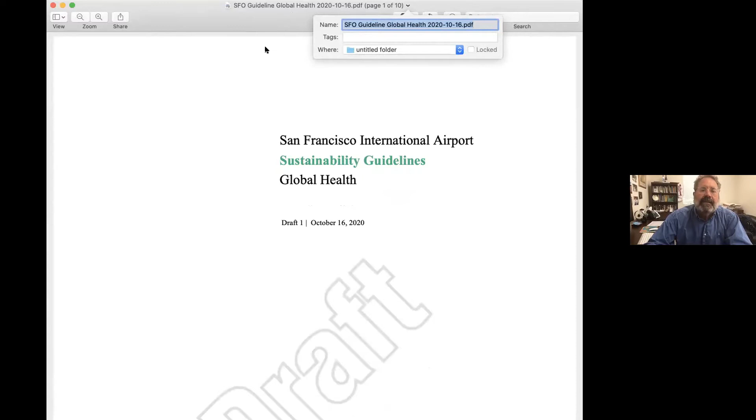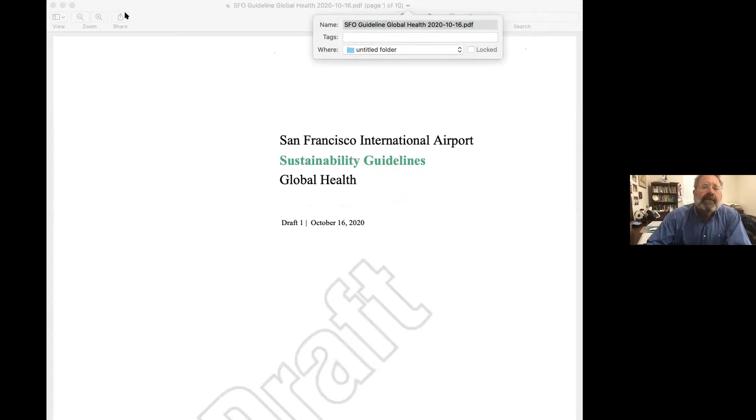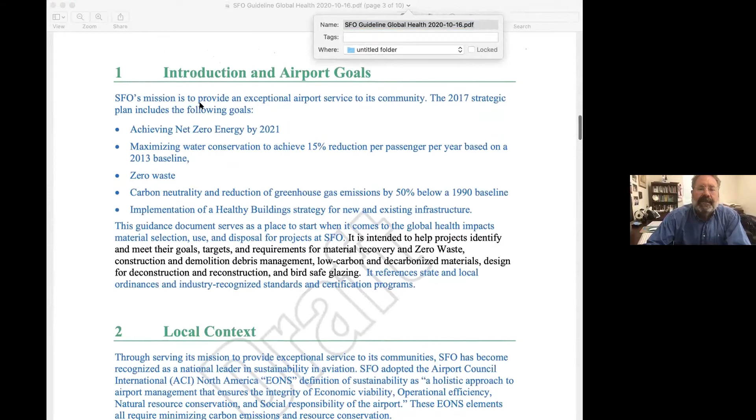Now, systems for demonstrating the value are being developed all over now. This, for example, is from San Francisco International Airport. And these are the guidelines they're using for the further development of the airport. They've set out guidelines over the coming decade of how the airport is going to achieve 50% emissions below 1990 base levels in both their operations and the material selections that they have.

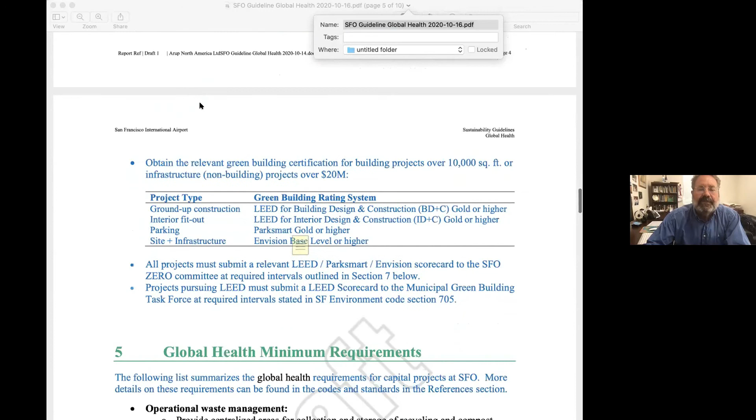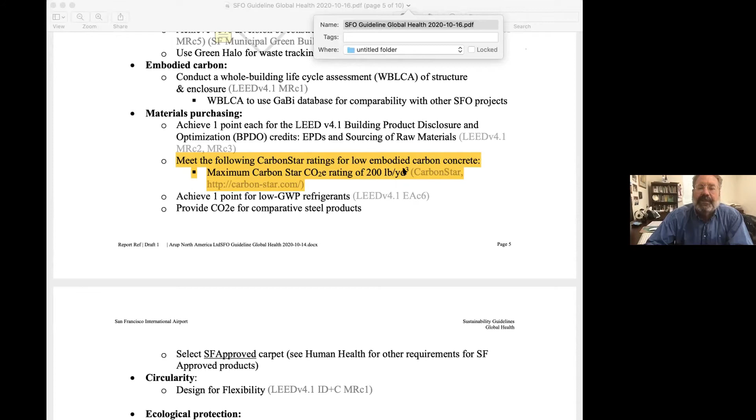So for example, they have the typical LEED certification that you would use, but when it comes to the concrete, they're specifying the carbon intensity of the concrete using the Carbon Star rating system, the new rating system for quantifying the carbon intensity of concrete, which is auditable by a third party and a repeatable methodology for essentially an LCA on concrete. Here they are specifying concrete that's 200 pounds of CO2 per cubic yard, whereas a typical yard of concrete may be 600 pounds.

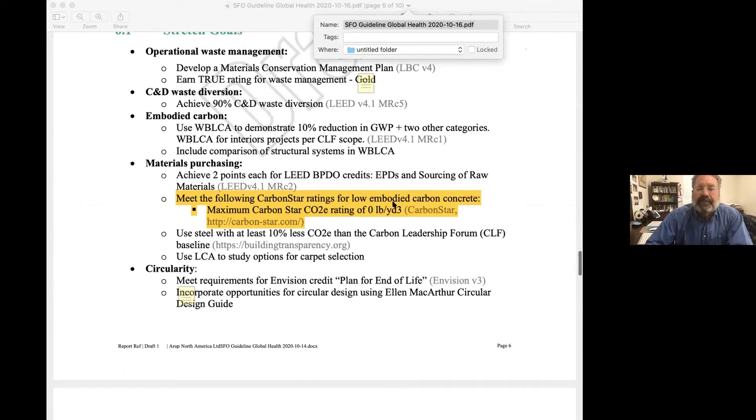They have stretch goals where they're seeking concrete that's 0 pounds per cubic yard, meaning carbon neutral in their build out. And even exceptional project goals where they have carbon negative concrete, where they've been able to sequester CO2, in this case using carbon sequestered aggregate, to make the concrete where we're storing the CO2. Now these systems are developing broadly and will undoubtedly see a lot of traction in coming years.

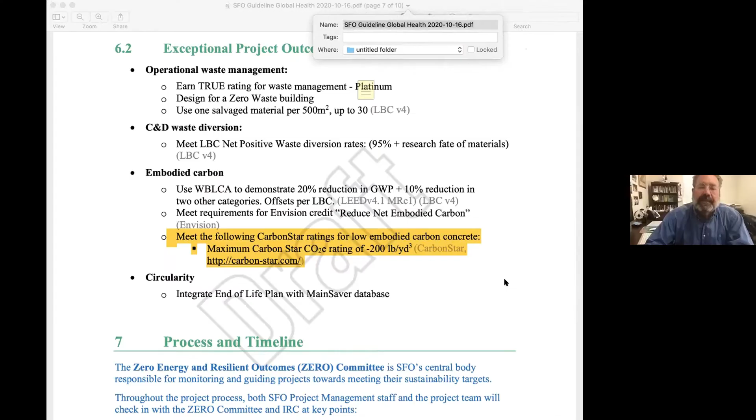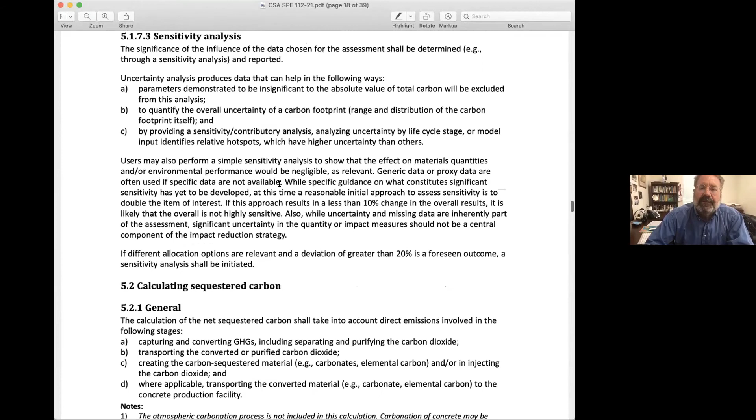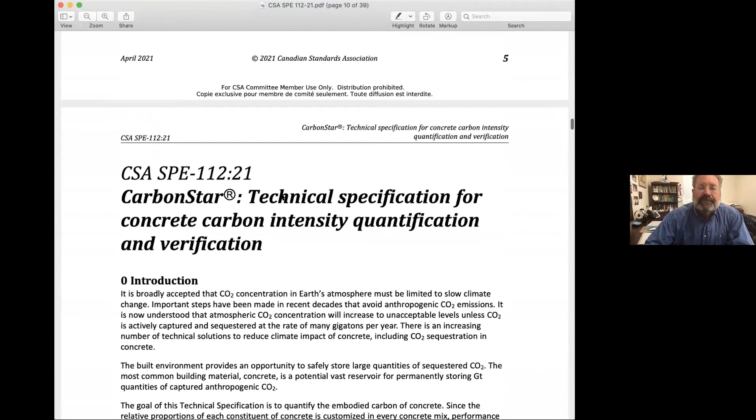For instance, the Canadian Standards Association has recently issued the Carbon Star North American Technical Standard, which allows for the specification of the carbon intensity and how to quantify it and verify it. This allows governments to use their procurement of materials that have sequestered CO2 in them to quantify the amount of CO2 that will be sequestered.

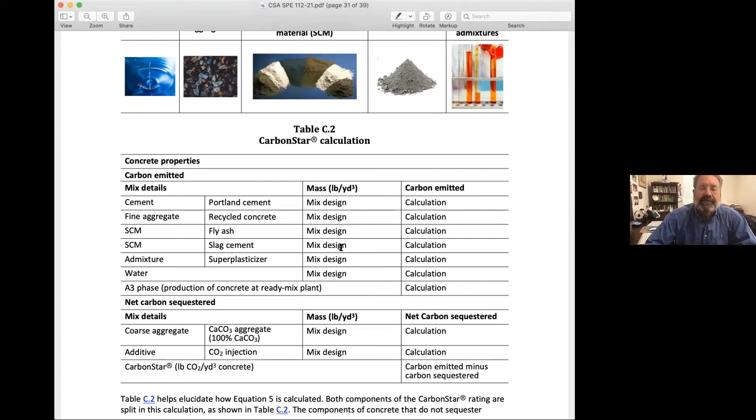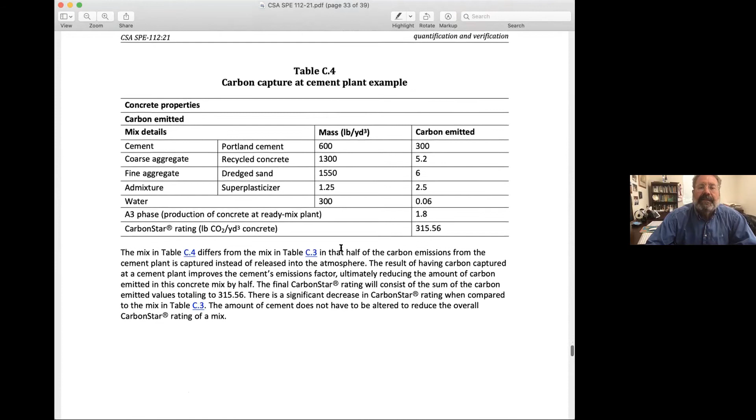And this is where the concrete industry can really step in and make a difference, not only with understanding what the real carbon intensity is of concrete in a verifiable, validated method that's auditable by third parties, but also provide examples of how their leadership can lead the whole climate change community and provide significant guidance for how we're going to meet our goals in Glasgow.

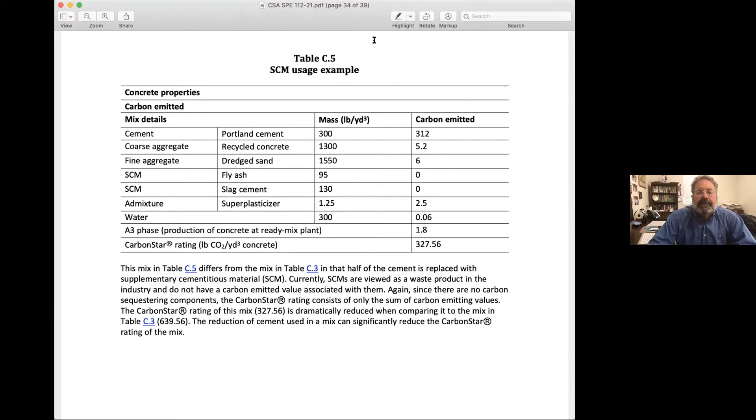Thank you for allowing us this opportunity to share our innovation for the cement and concrete industry, CO2 utilization for concrete. In today's presentation, I'll share a little bit about how CarbonCure technology works and where we're available.

First of all, did you know that the World Green Building Council has begun its Advancing Net Zero campaign, which is bringing embodied carbon up front? In this campaign, the goal is to reduce embodied carbon by 40% by the year 2030 and to eliminate embodied carbon by the year 2050. Now, embodied carbon is the carbon footprint of buildings before the lights are turned on for the first time. It's the carbon footprint that comes from building materials and construction.

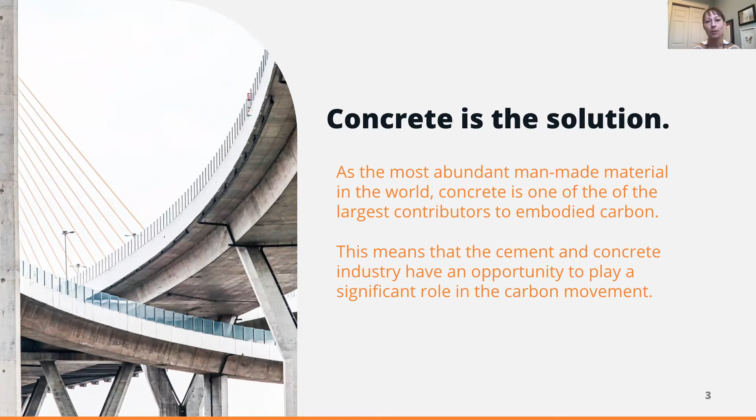Concrete has the opportunity to be part of this solution. As the world's most abundant man-made material, concrete is one of the largest contributors to embodied carbon today. This also means that concrete has the ability to play one of the most impactful roles in achieving net zero embodied carbon. CarbonCure is working with the cement and concrete industry to help decarbonize the industry to meet these objectives.

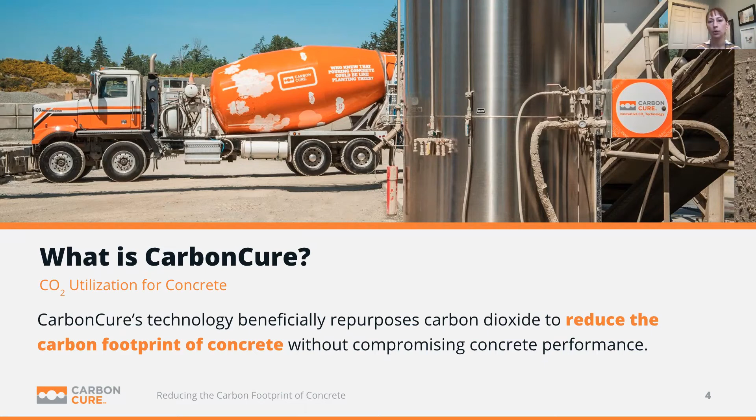What exactly is CarbonCure? We are a CO2 utilization technology provider for concrete. CarbonCure's technology beneficially repurposes carbon dioxide as an admixture to reduce the carbon footprint of concrete without compromising the concrete's performance. A little bit of background information about CarbonCure. We were founded in Halifax, Canada in 2012 by Rob Niven, our CEO and founder.

To date, our technology is in use at over 350 concrete plants across the globe. Most of this is within the United States. We are beginning our expansion to other parts of the globe, including Europe, Asia, and Australia. To date, over 8 million cubic meters of concrete have been produced using CarbonCure. Now, this concrete is being delivered to a wide range of construction projects, some of which I'll highlight, ranging from rural driveways through to large industrial warehouses and offices and highways.

CarbonCure recently was named the NRG COSIA Carbon XPRIZE winner. This was a really prestigious competition that spanned over 5 years, in which the goal of the competition was to utilize CO2 to make valuable products. Our co-winner of this competition was also an innovator in concrete. And this really shows how much concrete has the ability to be part of this solution, the carbon solution through CO2 utilization.

We're also very proud to be 2020 North American Company of the Year and to be backed by many fantastic and recognizable companies that are supporting our global expansion and supporting our company's success. Now, our mission is to reduce 500 megatons of carbon emissions annually by the year 2030. This is equivalent to taking 100 million cars off the road. In order to achieve this mission, we need the partnership of the cement and concrete industry. We're looking for a partnership with you.

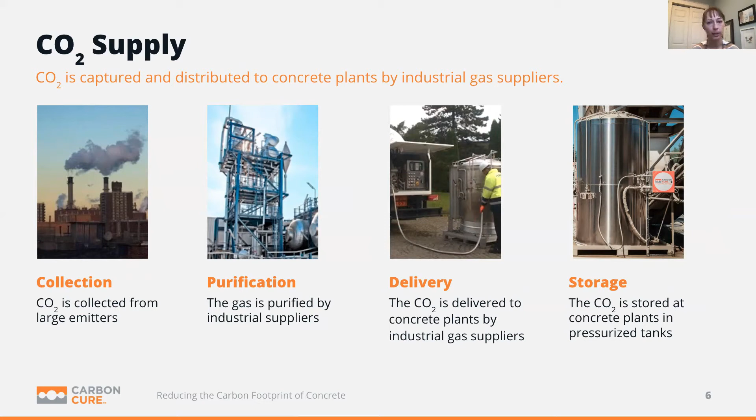At every concrete plant where our technology is installed, the CO2 supplier will install a pressurized tank where the CO2 exists as a liquid. That CO2 supplier will then come by on a regular basis and refill that tank with CO2 as needed. Our technology is a precise metering and injection system. We are pulling that liquefied, purified CO2 from the pressurized tank and introducing a precise amount into the concrete as it's being mixed. This is all integrated with the batching software that exists at any given concrete plant, and it's delivering a precise dose based off of the particular batch of concrete that's being loaded at that moment.

Now, this is happening at the same time as other processes in the batching sequence, and so it's not impacting the cycle time or the time that it takes to make the concrete. At the end of the day, really, from an operational perspective, it's exactly the same as introducing any other kind of admixture.

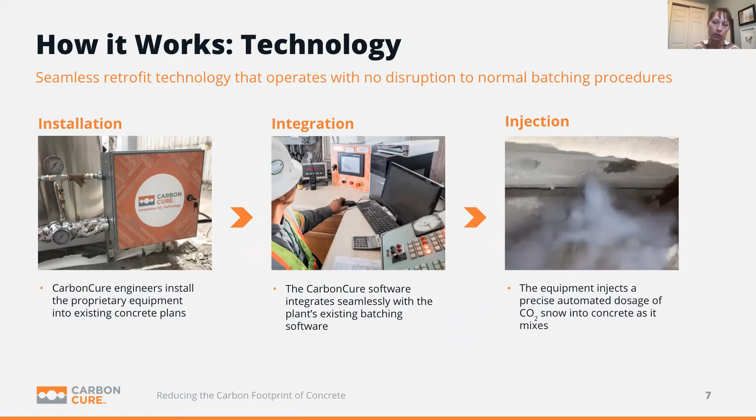Now, what happens when that CO2 is introduced into the concrete mix? A chemical reaction occurs where that CO2 finds calcium ions from the cement, and these two materials in the presence of water have almost this magnetic attraction to each other. They bind together and immediately begin to convert into calcium carbonate, which is essentially limestone. So we are turning what used to be a greenhouse gas into a mineral that now becomes permanently embedded in the concrete.

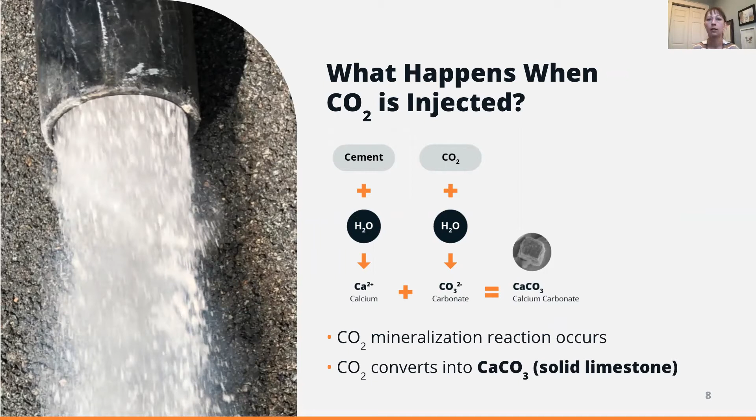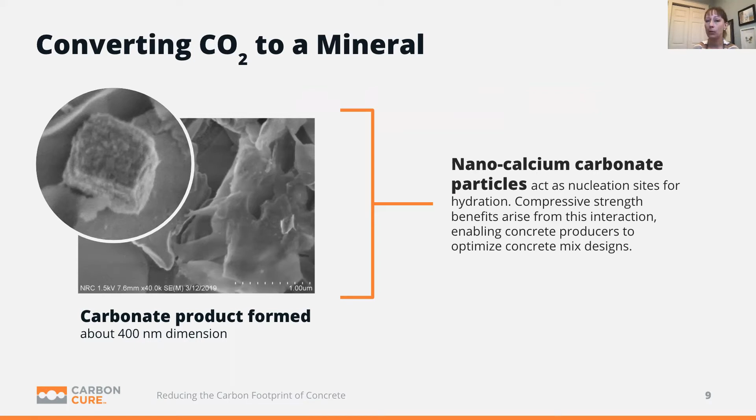What's even more important about this process is that this mineralization of the CO2 improves the concrete's compressive strength. The mechanism behind this is we have this CO2 that's being introduced into the concrete and at a nanoscale is converting into these nano-sized calcium carbonate particles. And these nanoparticles are smaller than silica fume. They become embedded throughout the matrix of the concrete mix. These nanoparticles will bind to the cement grains and increase the surface area of the cement grain, making that cement more efficient. So with more efficient cement, that enables concrete producers to in turn engage in mix optimization.

The CO2 has a neutral impact on the fresh and hardened properties of concrete. There have been many, many studies conducted by academics, by third-party organizations, such as in the United States, departments of transportation, that verify that the fresh properties, the set time, workability, concrete pumping, air content, temperature, finishing are unaffected by CO2. Hardened properties, freeze-thaw, pH, density, durability, color, texture, again, unaffected. In fact, some studies are indicating that there are certain durability properties that may be improved through the use of CO2.

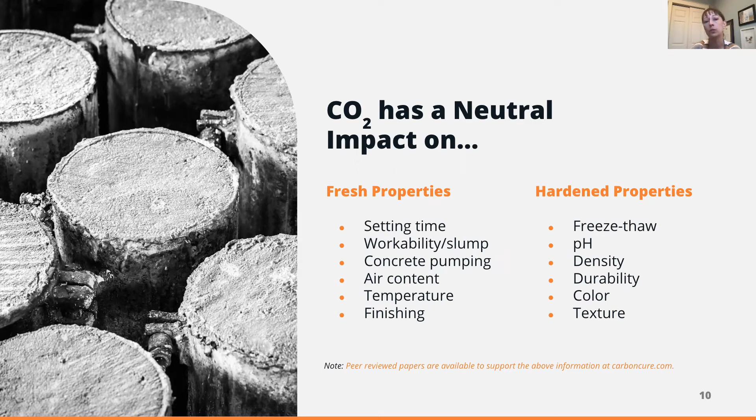At the end of the day, the concrete that's delivered to construction sites meets the same quality and control standards, the same compressive strength, but with a reduced carbon footprint. The amount of carbon that can be reduced really depends on a number of factors. It's very mix specific. It's typically between 12 to 20 kilograms of CO2 per cubic meter can be reduced. This typically represents about a 5% reduction in the overall carbon footprint.

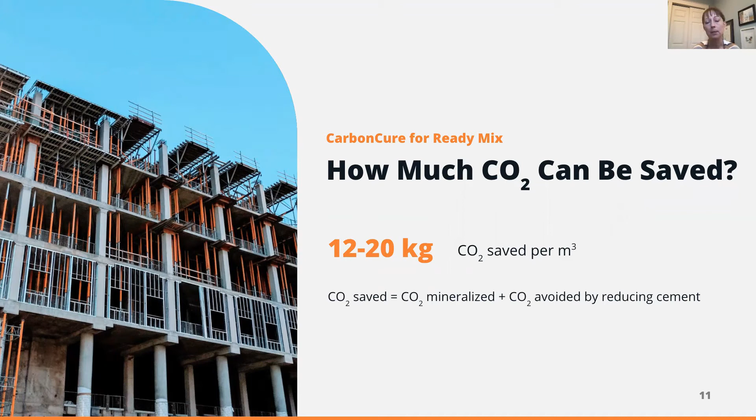Now, the CO2 is saved through both a combination of mineralizing CO2 and by optimizing the cement content in order to reduce further embodied carbon. As I mentioned, we've been utilized on a number of projects to date, primarily across the United States and Canada, some of which I'll highlight here. So everywhere from in Halifax, Nova Scotia, where we have lots of freeze-thaw conditions to consider. Here's an example of a hockey arena. You can see on the far right, again, another Canadian project. This is a de-icing apron with the Calgary airport.

So on this particular project, it was 25,000 cubic meters of concrete supplied from a portable batch plant over the course of 8 weeks to deliver concrete paving used for airport tarmac. So as you can imagine, this was a very stringent application that required thorough engineering review, and we're very pleased to say that concrete was supplied successfully, and that airport is in use today and with great success.

If you'd like to look at other parts across North America, one of the buildings that I'd like to highlight is perhaps our marquee project currently underway in Arlington, Virginia, Amazon's headquarters. In this particular phase of the project alone, we expect to save over 1,250 tons of CO2. So this is very exciting to be aligned with mission-aligned organizations who are also working to reduce embodied carbon.

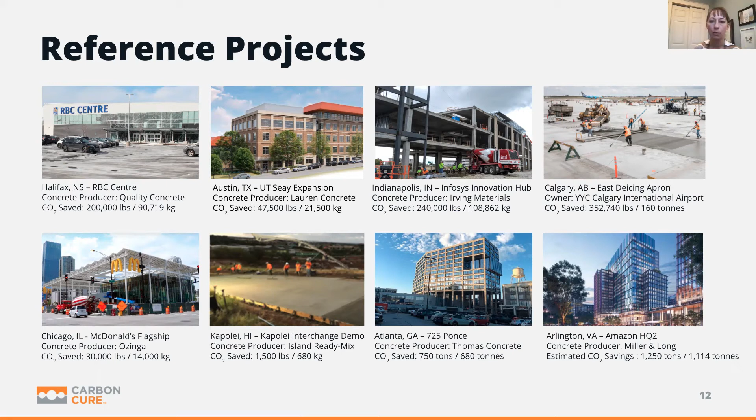And it should be noted that this is also being used in everyday kind of concrete applications. So while this really appeals to the Amazons of the world who are looking for solutions to reduce embodied carbon, it's accessible to the everyday concrete finishers and home developers who are building with concrete every single day.

And I mentioned we have partners across the globe. So within North America in particular, we've certainly had our strong share of partnership and growth. We continue to grow on an exponential basis in terms of both the number of concrete producers who we've partnered with, as well as the cubic meters of concrete being supplied. And we are beginning to partner with producers in other parts of the globe. We're certainly interested in working with mission-aligned organizations who are looking for solutions to reduce embodied carbon and engage in best practices of mix optimization for concrete.

So with that in mind, again, CarbonCure is on a mission to make concrete part of this climate solution. We truly believe that concrete is a fantastic material that can be part of the global solution to reduce carbon.

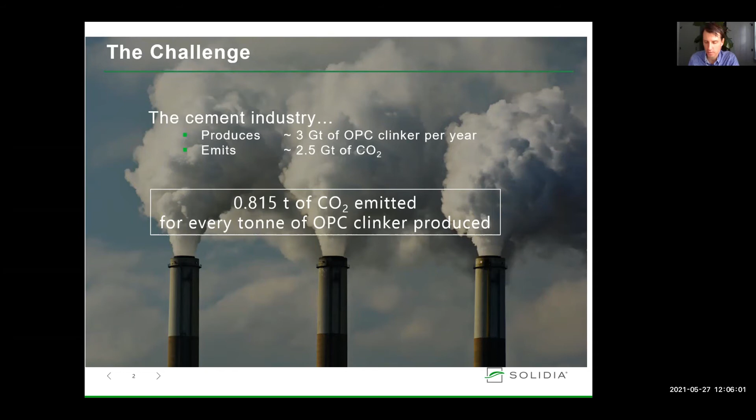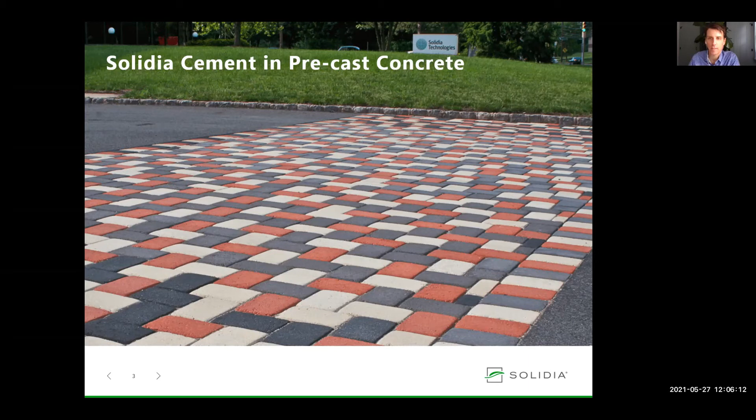Let's first take a look at Solidia cement and precast Solidia concrete. This photo shows a precast Solidia paver installation at our headquarters. Solidia cement is commercially produced both in the United States and Europe. It's produced using the same raw materials and the same equipment presently used for OPC production. The production of Solidia clinker emits about 30% less CO2 at the kiln when compared to OPC. Lower emissions are the result of the low limestone chemistry of Solidia cement, which requires lower kiln temperature, saving fuel, and less CO2 emitted from limestone calcination.

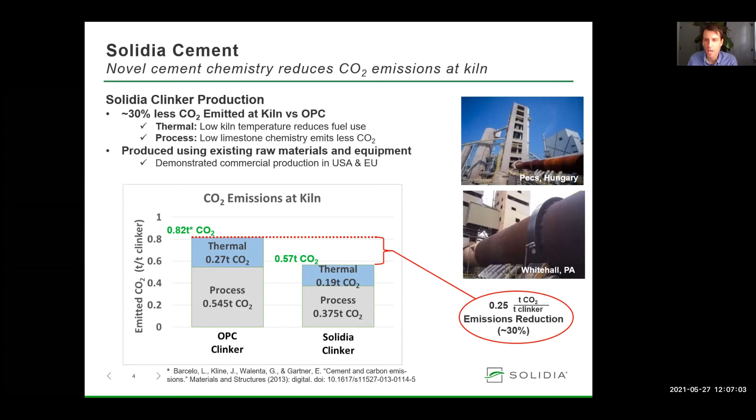A bar graph below illustrates savings between OPC clinker and Solidia clinker. Total savings for Solidia clinker production is 0.25 tons CO2 per ton of clinker relative to OPC. I should note that for both cements, I'm reporting emission numbers for clinker, and I'm not considering the addition of things like limestone or gypsum.

One application of Solidia cement is in precast concrete. Solidia cement is a non-hydraulic cement. It cures by reacting with gas phase CO2. Unlike OPC, Solidia cement doesn't react with water.

In the presence of CO2 and a small amount of water that serves as a solvent for the carbonation reaction, calcium silicates are converted to calcium carbonate and silica. The products are stable and impart excellent properties to the final product. During the carbonation reaction, up to 0.24 tons of CO2 are sequestered per ton of cement. This reaction is rapid and goes to completion in hours, not days like in the case of OPC.

An additional reduction in footprint occurs due to CO2 sequestration during curing of Solidia concrete. Here we're using 0.24 tons of CO2 per ton of cement. This results in an emissions reduction of 0.44 tons of CO2 per ton of cement. I should note that the small parasitic losses occurring during the curing process are not included. We'll use this number, the 0.44, on the next slide to calculate the potential impact of this technology on industrial CO2 emissions.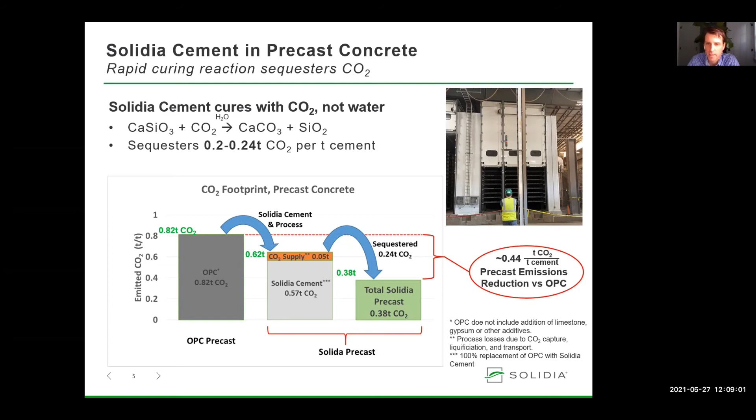Solidia precast concrete is in the market today with paver and block production in North America and Europe. Our commercial production has demonstrated cost and performance advantages over OPC-based precast concrete. We've started with pavers and blocks because of the ease of entry afforded by manageable code requirements and have seen fast adoption both by producers and end users.

The potential CO2 impact of precast Solidia concrete is large. Traditional precast represents 30% of the concrete market and consumes about 0.9 gigatons of cement annually. Converting 100% of the cement used in precast to Solidia cement would save up to 0.4 gigatons of CO2 annually.

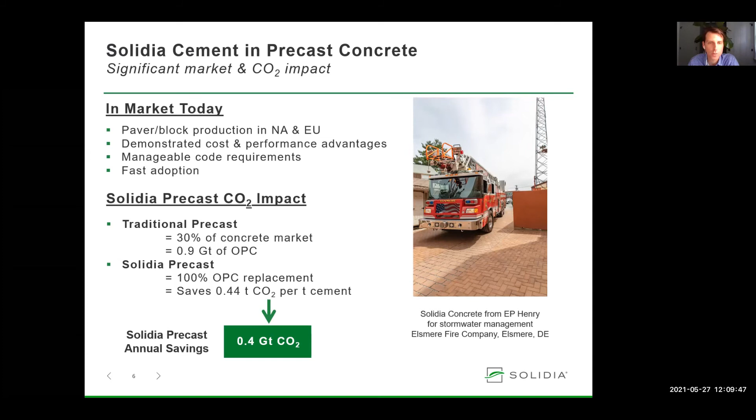In this section, I'll talk about how Solidia cement, which reacts with gas phase CO2 to cure, can be used in ready-mix applications in a way that doesn't require CO2 gas for curing during end use and at the final end use site.

One way that Solidia cement can be used in ready-mix applications is by using it to make a synthetic pozzolan, we refer to this as Solidia SCM, that can be added to OPC-based concrete. Like fly ash or slag, Solidia SCM can be used to replace up to 50% of OPC in concrete and has been shown to improve concrete performance.

The box at the top of the slide shows our process for making 1 ton of Solidia SEM. 0.8 tons of powdered Solidia cement is reacted with 0.2 tons of CO2, in this case from flue gas, to create 1 ton of carbonated supplemental cementitious material, or SCM, in powdered form. I'd like to emphasize that CO2, which in this case is an industrial waste product, makes up 1/5 of the final mass of the product. This means that only 0.8 tons of cement are needed to make 1 ton of final product.

The carbonation reaction for making Solidia SCM is the same reaction that occurs when precast Solidia concrete is made. Calcium silicate plus CO2 forms calcium carbonate and silica. The silica, which forms at the surface of the SCM particle, acts as a binder in the presence of OPC.

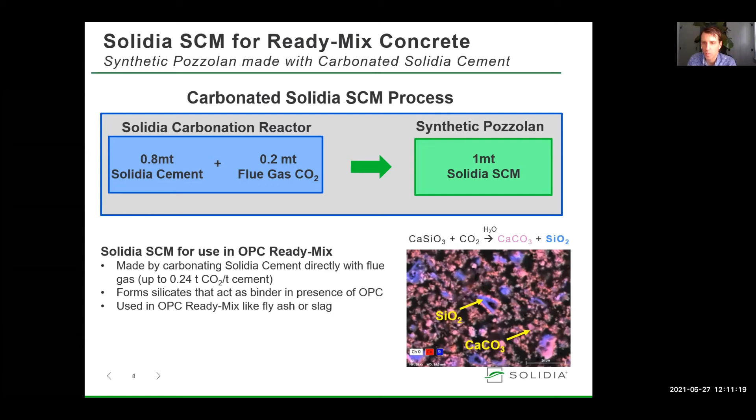Like precast Solidia concrete, Solidia SCM has a lower CO2 footprint than OPC-based products. The waterfall chart illustrates footprint reduction starting with our baseline 1 ton of OPC clinker, which emits 0.82 tons of CO2 at the kiln. As explained on the previous slide, less than a ton of Solidia cement is needed to make a ton of Solidia SCM. In this case, we need 0.8 tons of Solidia cement, which has a footprint a little more than half of OPC's footprint. A further reduction in footprint comes from sequestering 0.2 tons of flue gas CO2.

This brings the final footprint of 0.82 down to 0.23 tons CO2 per ton of SCM, a total reduction of 0.59 metric tons of CO2. I should mention that we do not include parasitic process losses here, which are small relative to the overall savings.

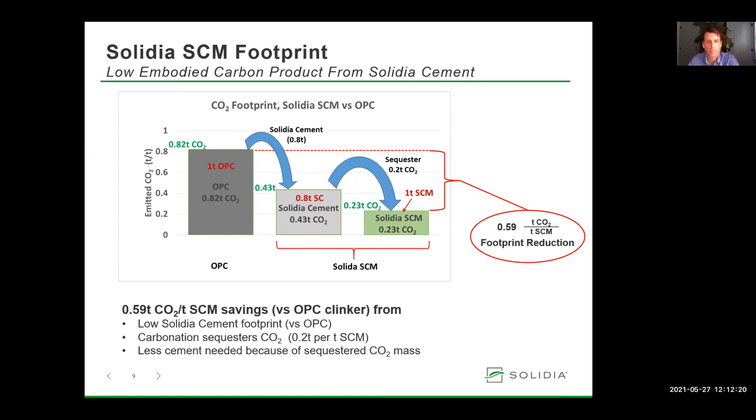Solidia SCM is currently under development and will soon enter the market. We have already demonstrated this technology with pilot scale test pours, shown here in the photo, and have seen excellent performance both in terms of mixing, forming, and final properties. Evaluation and testing are underway at certified third-party and academic labs.

Since Solidia SCM is used as a partial replacement for OPC, higher replacement levels lead to increased CO2 savings. We have demonstrated successful replacement levels up to and including 50%. The plot illustrates CO2 savings versus replacement level. Using the base case of 35% replacement level, CO2 footprint is reduced by 0.2 tons CO2 for every ton of blended OPC made with Solidia cement.

Like precast concrete, the potential CO2 savings of Solidia SCM is large. Traditional ready mix represents 70% of the concrete market and consumes about 2.1 gigatons of clinker annually. Replacing 35% of the OPC cement used in ready mix with Solidia SCM would save up to 0.4 gigatons of CO2 annually.

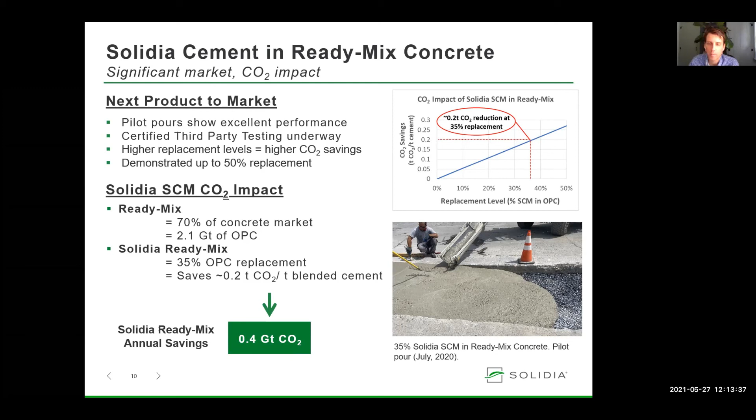We started off this presentation with a major challenge facing the cement industry: 2.5 gigatons of CO2 emissions arising from the annual production of 3 gigatons of OPC clinker. Taking the 0.4 gigatons CO2 savings from both Solidia Precast and SCM gives a combined annual reduction in CO2 footprint of up to 0.8 gigatons. This represents a roughly one third reduction in CO2 emissions and can be done with very little change to existing practices, equipment, or raw materials. I'd like to stop here and close by thanking you all for your time and attention.

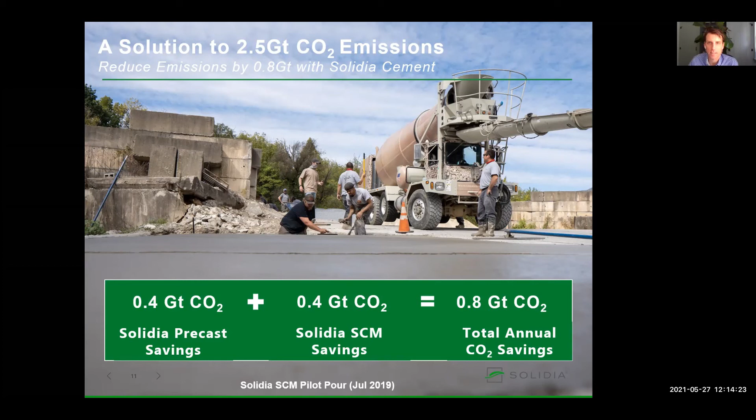Hi everybody, my name is Jérôme Portal and I am working with Fives FCB company in France. Today I would like to introduce you to the use of one of our flagship machines, the FCB Rhodax 4D, in the field of concrete recycling.

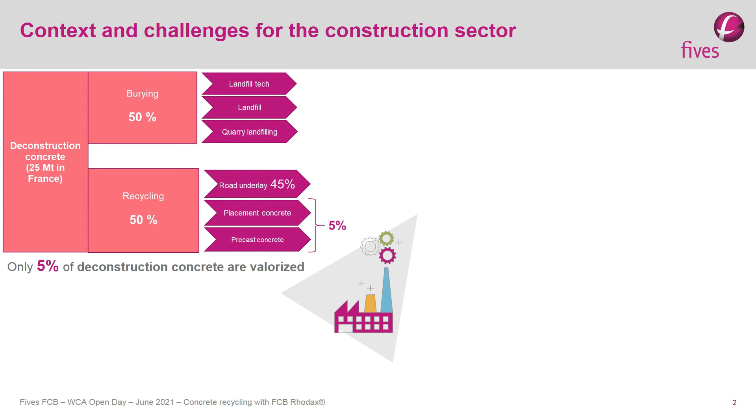The construction sector is facing many challenges, three amongst them to be noticed. First, the volume of wastes coming from demolition. In France, about 50% of these materials are recycled and 50% are buried. Buried material cannot catch CO2 and cannot be reused to make new concrete. Also, there are less and less permits delivered for the extraction of natural sands and gravels in order to preserve our environment, so we need to find a solution to substitute these resources.

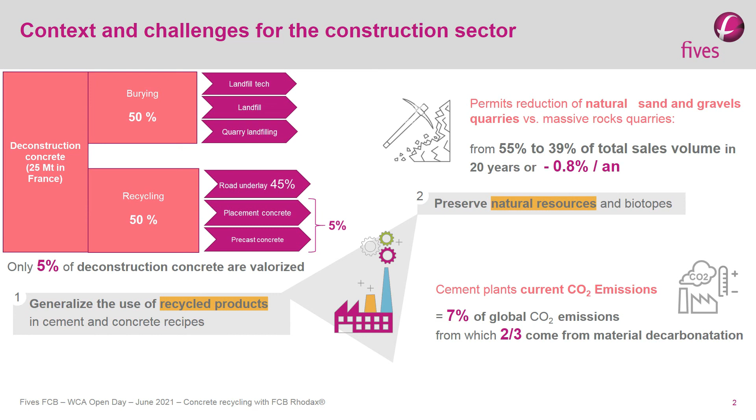Cement plants are a significant contributor to current CO2 emissions, 7% of global CO2 emissions in fact, mainly because the process implies the decarbonation of limestone. New routes must be found to reduce the production of clinker.

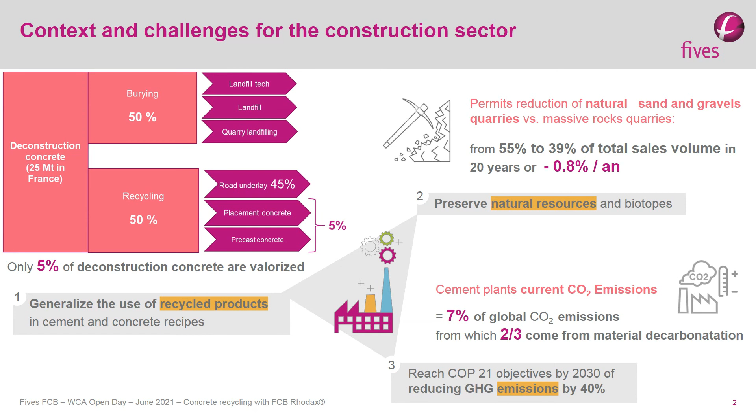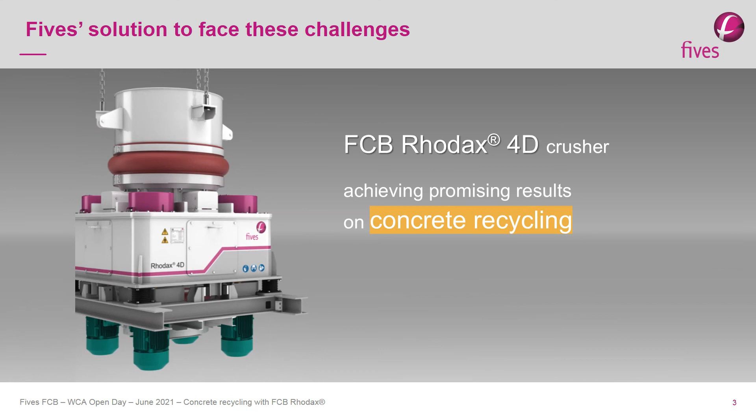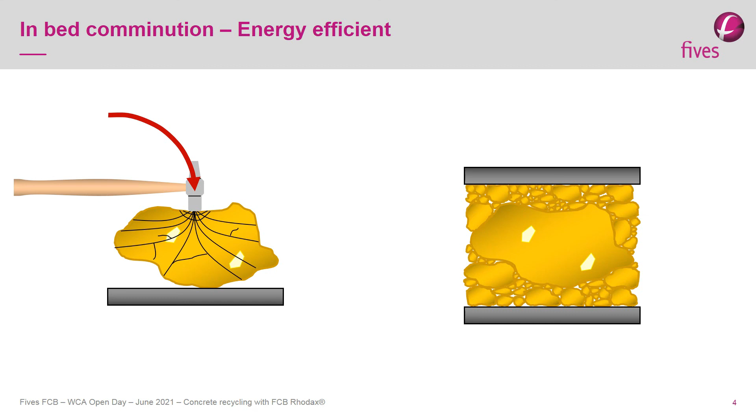On the left-hand side, you have a figure of what happens in impact crushing, and on the right-hand side, you have the figure of what happens in compression grinding. Rhodax is an interparticle crusher that works in bed comminution, like FCB Horomill, vertical roller mill, and HPGR.

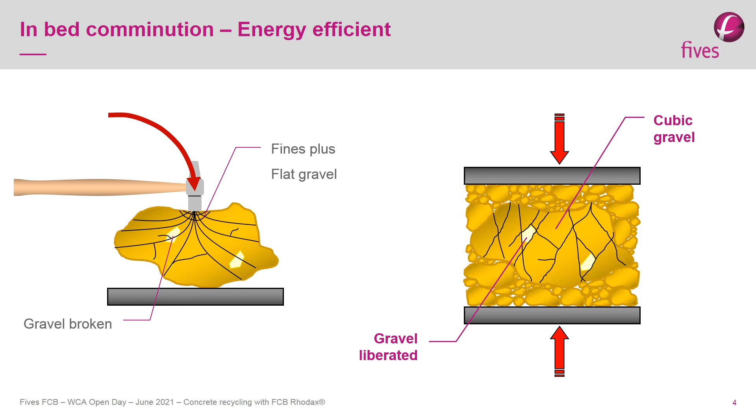Benefits in concrete application are to liberate the gravels from the mortar matrix and to get a very good particle shape. Also, the quantity of ultrafines generated can be controlled. Traditional impact crushers will produce smaller particles of concrete. A Rhodax will separate the constituents of concrete due to the compression crushing, as you can see in this picture.

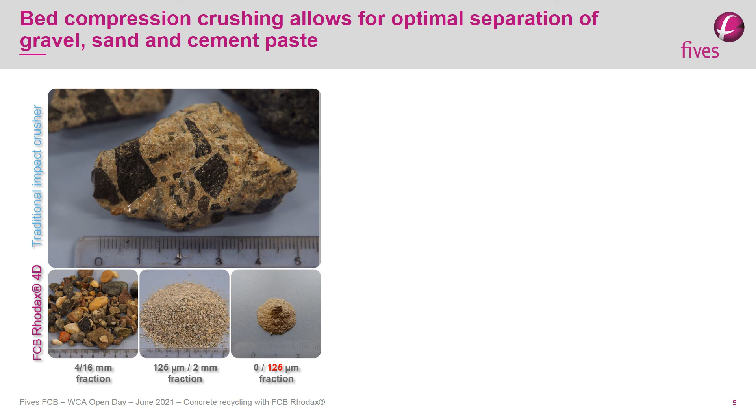Our vision is to answer the 3 challenges of the construction sector: recycling aggregates, producing mechanical sand, and valorizing the hydrated cement paste in the cement process. If these 3 routes can be put in place, then concrete could be 100% recyclable.

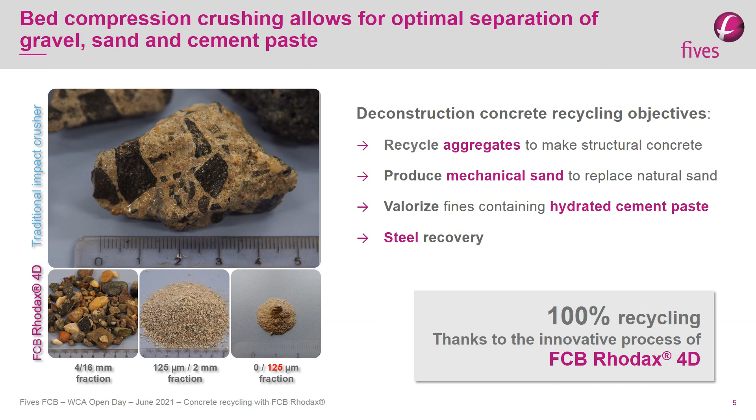One of the routes to valorize the fines is to put them in a raw mill mix at the cement kiln inlet. Without compromising the chemistry, up to 20% of raw mill can be replaced by the hydrated cement paste. The substitution could lead to a potential reduction of 6% of thermal consumption and 12% of CO2 emissions reduction. So this route is an important means for cement producers to reduce their CO2 footprint.

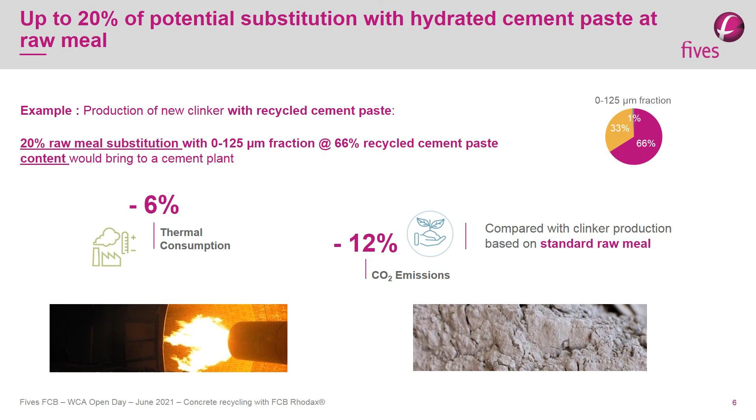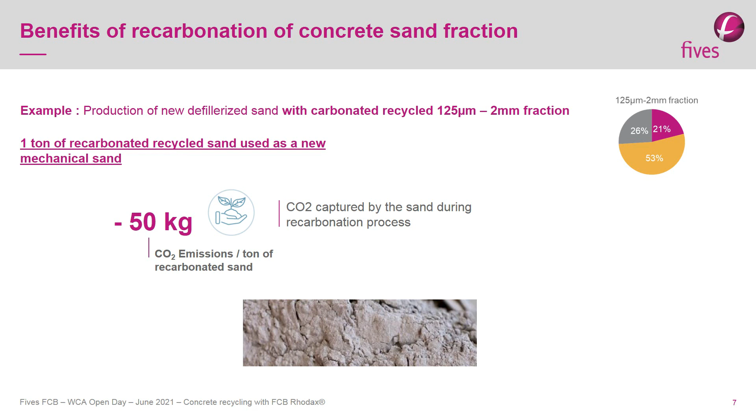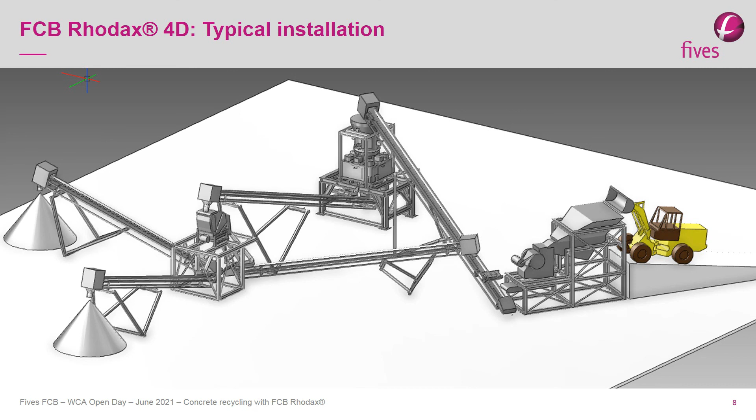Thanks for those fascinating insights from all 4 of you, illustrating the range of different options that we have to address the problem of decarbonization. I think from these presentations, we can also be somewhat optimistic about the potential. Of course, longer term, we'd like to see cement and concrete change from being a very substantial emitter to realizing its potential as a carbon sink.